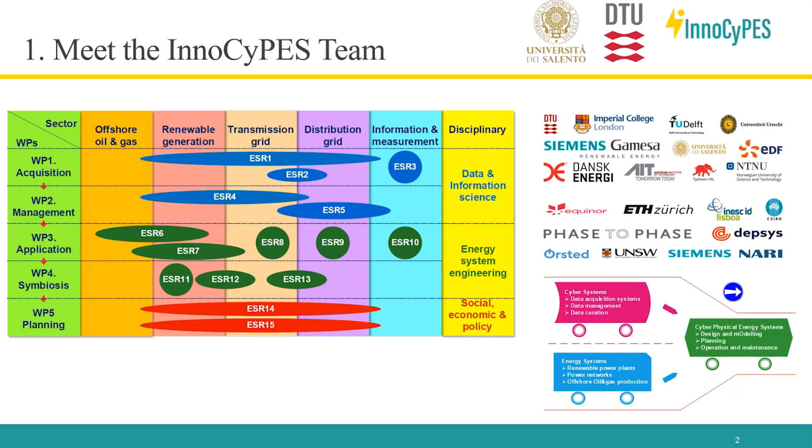But today, after the presentations that our colleagues gave on offshore wind control, robust control, or for instance, communications in offshore wind power plants, we would like to focus on the economics and social part. These were ESR 14 and 15, which in our case is Roberto Monaco and I. We would like to give an overview on what's the value of all these digital technologies, how to assess them, and also how to evaluate the regulatory barriers that are arising across this deployment of digitalization.

So about the presenters, just a little bit. Roberto Monaco and I are enrolled as PhD candidates at DTU, Roberto at the Department of DTU Management and Industrial Economics, and in my case, at the Department of DTU Wind. We both are third-year PhDs. It's been already a long journey with many secondments across Australia, Canada, and different other places where we have shared very good moments and very good learnings as well.

And we have also recently joined the United Nations Economic Commission for Europe, collaborating with the expert group, the Task Force on Digitalization in Energy. And we would be more than glad to give this presentation today, showing more about the topics we are addressing from day to day. This is just an overview of the collaboration network that we have been working on across Australia, Canada, Europe, DTU, also in collaboration with EDF and our colleague ESRs.

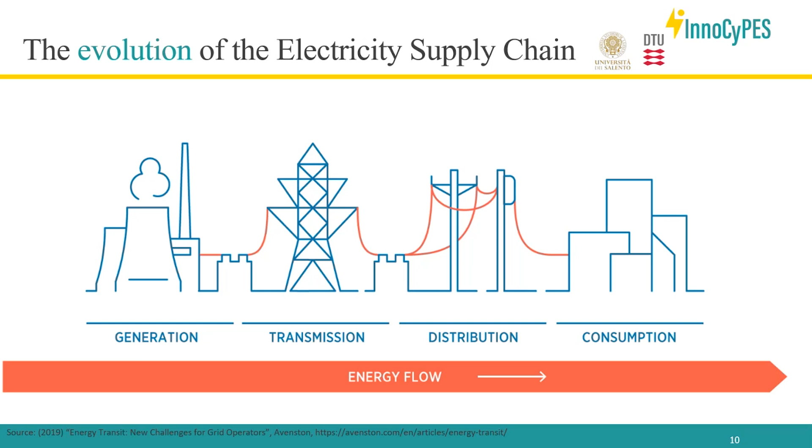And now, this is just to understand why we decided to focus on distribution system operators. So this is the conceptualization of the electricity supply chain as we currently know it. There is a unidirectional energy flow that starts from the generation of big power plants, then is transmitted at high voltage and distributed at low voltage by distribution system operators to the final customers. However, with this energy transformation, this is the new configuration of our electricity supply chain. And as you can see, there are a lot of changes, especially at distribution level.

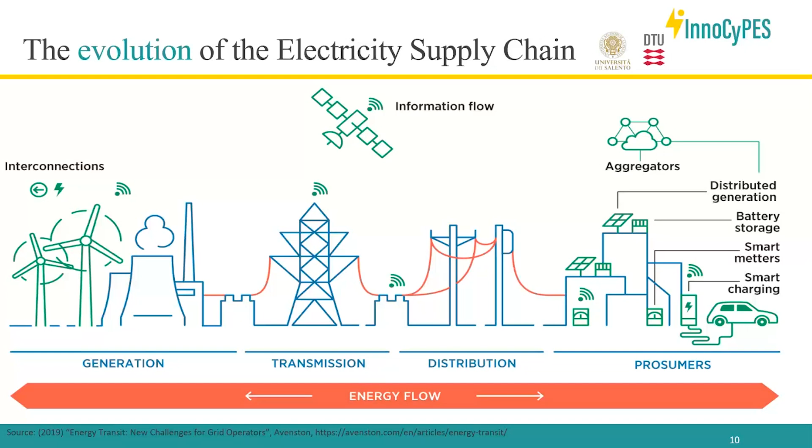You see a lot of new actors that are emerging at the interfaces between the distribution system operators and the final customer. We have emerging actors like aggregators, prosumers, and also an increasing integration of renewable energy sources, smart meters, and smart chargers for EVs. And this was one of the motivations that made us choose distribution system operators as our main target, as they are going to face a lot of challenges. In particular, when we are talking about renewable energy resources, 70% of the capacity of new renewable energy resources in the EU and UK will be connected to the distribution grids.

And the distribution system operators, from one side, are facing a lot of challenges in integrating new renewable energy sources, EV, so they need to increase the capacity of the grid, a grid which is old and where the observability is still lacking. So as I said before, in order to unlock the flexibility and face the challenges of the energy transition, they need to modernize.

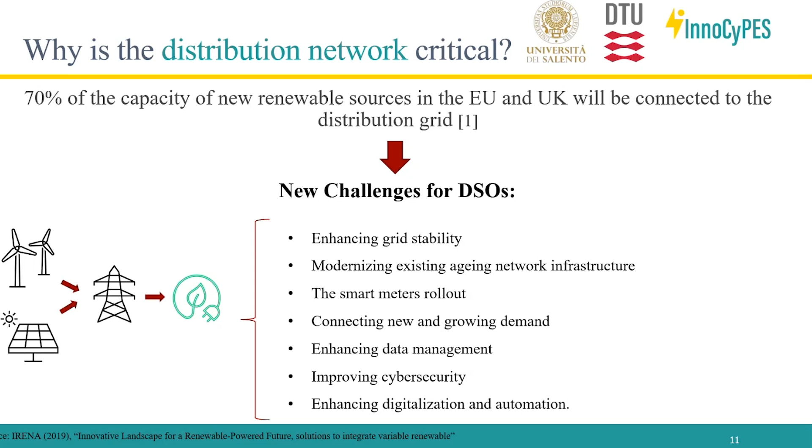From one side, they need to upgrade the grid in terms of capacity, so infrastructure investment, but also digitalization investment in order to unlock real-time operations. And in order to face these challenges, another motivation is that DSOs need to enhance their current role. Because in the traditional system structure, in academic terms, the DSOs used to have a passive role, just regarding the connection and disconnection of distributed energy resources, transforming high voltage to low voltage and then distributing it.

So a more passive role in the grid, while in the future, with this increasing integration of distributed energy resources, they need to take an active role in peak load management, distributed energy resources, network congestion management, procuring voltage support, and better communication with the transmission system operators and so on. So as you can see, DSOs are playing a vital role in the current energy transition. And among all the actors, they are the ones facing lots of changes.

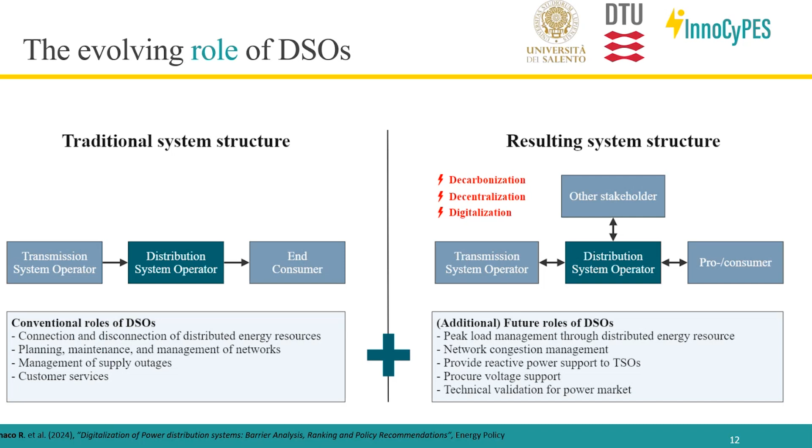And this is just a logical recap that I would like to show you. So as I said so far, DSOs are playing a pivotal role, and they need to empower their current roles through digitalization investment. However, nowadays, digitalization investments are still limited and partial. Let's think, for example, about the case of smart meters, where the penetration rate around Europe is now increasing, but some countries are still under 30% penetration.

And when we talk about visibility at the low voltage level, we can say that we are almost blind. In a use case in France, out of an asset base of 800,000 secondary substations, just 1% is digitalized. So we make the assumption that something is actually hindering digitalization. And this is the scope of our research: understand what is hindering digitalization, how we can face these challenges, and which methodology we can adopt to face them comprehensively.

And before proceeding, since we're talking about digitalization, it's important to make some clarification, especially in academic terms. It's important to distinguish among three different concepts, common terms that we usually find in research articles. When we talk about digitization, we mean a simple conversion from analog to digital data. The simplest example is translating a letter into a PDF file. So this is a process of digitization.

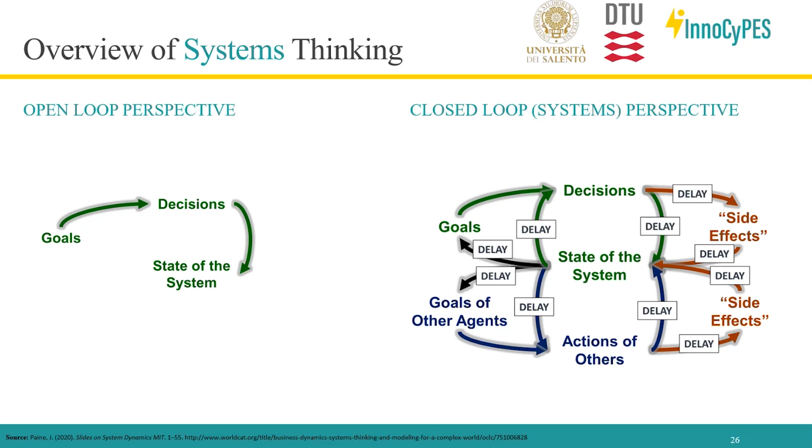They had to evaluate what were the resources on the Earth, the population evolution, and how these resources would evolve over time, to see when, for example, the oil resources would go down, or when would be the peak of the consumption of oil, or when the resources of the Earth would not be enough to supply all of us, right?

And actually, this study was validated in 2020, I would say, and they reached a very good conclusion, which is that they were right. The results match exactly what the estimations were in the 1970s. So look at how important it is to consider in these studies the system perspective and system dynamics.

So we see that these systems exist not only in global dynamics, but also in climate change. We see a very good example of feedback loops and complex systems, but also in the power sector. And this is what we are going to focus on in this presentation, specifically distribution grids. Sorry a bit for the ones present, because there are some bubbles. You can see it online with the colors a bit more clearly.

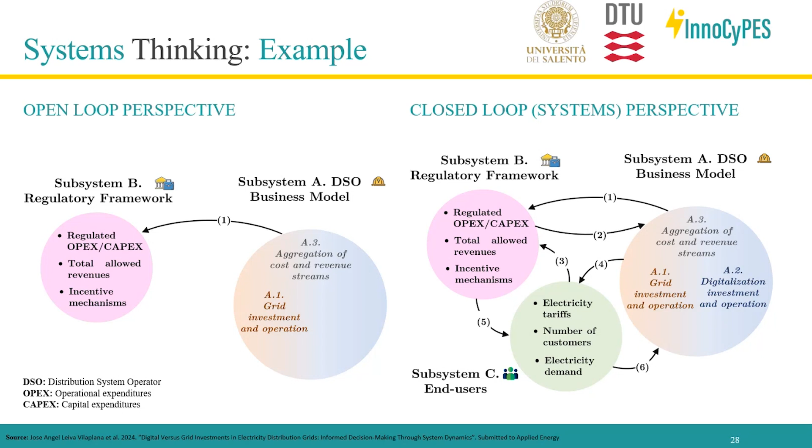So generalizing, what is a system? We all have a very good intuition of what a system is, because our human body is a system. It's a set of interacting elements, in this case parts of the body. But if we think about the distribution system, it's a set of actors, stakeholders that act according to different rules with their different interests and have a different dependency on previous decisions. So that's what we can consider a system. And it changes over time.

It's governed by feedback loops, by feedback structures, and we can observe that it's intrinsically non-linear. All these interactions, delays, and information gaps give us the complexity that we need to assess from a different perspective. So systems thinking can create models and help in describing the feedback loops within systems, and we will see how these models are useful for identifying problems and making more effective policy decisions.

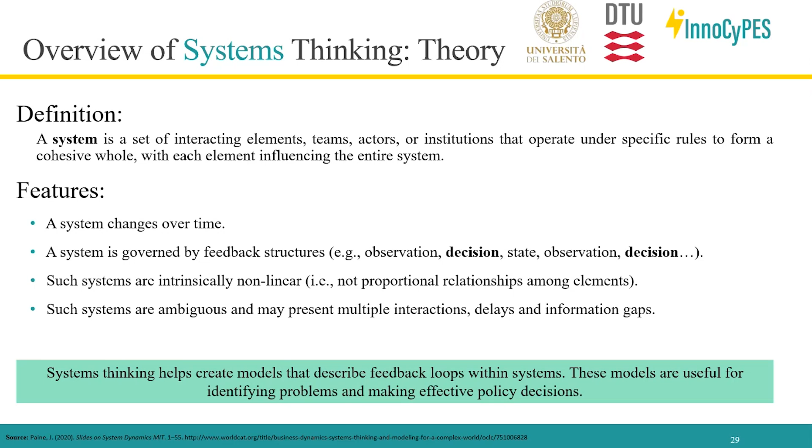So in the distribution grid, very specifically, let me quote the first two. The first two are Eurelectric and EPRI, two very big institutions related to the distribution grid, that mention that distribution grid investment should increase from an average of 33 billion to 66, 67 billion per year from 2025 to 2030. So this is a very significant amount of new investments.

Also, EPRI says that part of this investment would go to digitalization, and EPRI mentioned a long time ago, actually, that the societal benefits of digitalization or smart grid can be indirect and hard to quantify, but cannot be overlooked. So this is what we see from the system, what we can observe. All this news, all these quotes, but can we really see why? We would like to know how this happens, why it happens, and what are the decisions that lead towards these consequences.

And behind these decisions, there are some structures. The structure of a system is what drives the behavior and what drives the consequences. So this is exactly what we want to analyze. We want to see how this complex system that I mentioned before works and what are the specific variables that are hindering

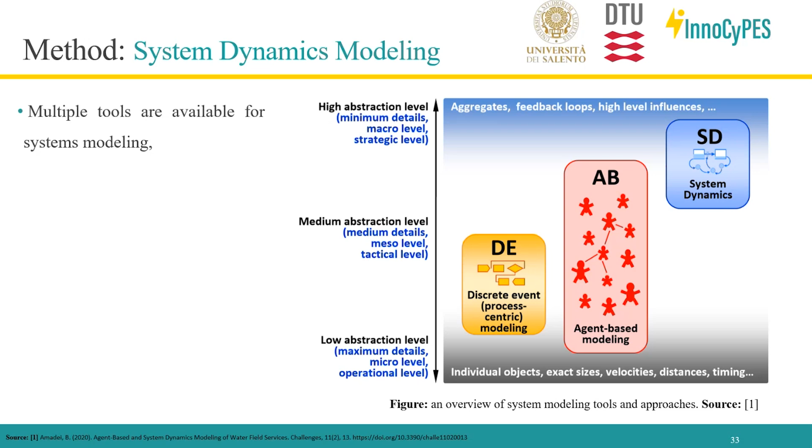We want to go towards system dynamics, which can provide us the abstraction level to match the big goals that we see from the European Commission or from the International Energy Agency with the reality of digitalization and the reality of the new grid investments that are required. And here is where system dynamics is the selected option as a methodology.

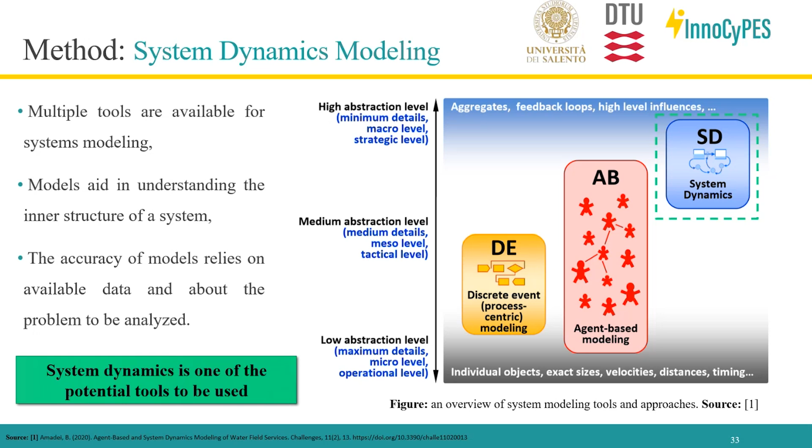What is system dynamics? Now we go into the specific methodology. This is a modeling methodology that arises in the 1950s from MIT, from Professor Jay Forrester. He started this idea coming from control theory, from the idea of feedback loops, applied to systems that are not specifically power systems or other systems related to power electronics, but in this case to social systems, population systems, urban dynamics, or the evolution of climate change, for instance.

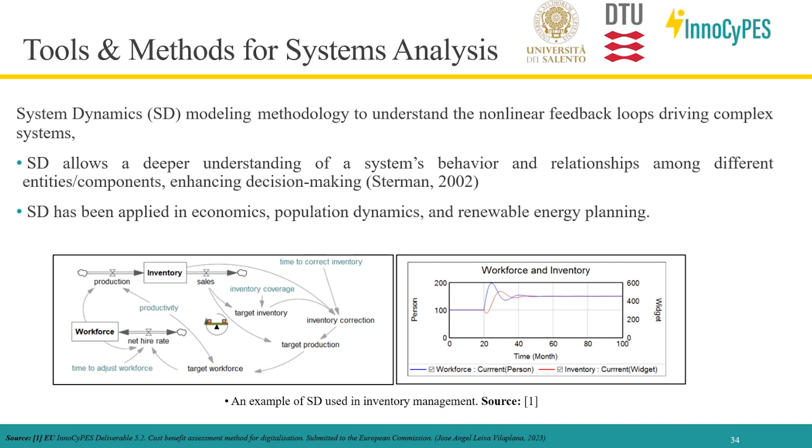So other types of variables that are also driven by differential equations. Each of these blocks actually represents a differential equation, and we see how this differential equation leads to changes in the behavior when we make a step response, as we see in the right-hand side of the slide. So system dynamics has this potential of assessing the high-level and highly complex problem.

And I wanted just to give you an overview of the main concepts of system dynamics very quickly. So we have all these keywords: reference models, causal links, causal loop diagrams, feedback loops, model validation, simulation.

Some of you already know from your studies, but I want to say that system dynamics has a very standardized process in the literature that has been carried out for different years. However, I just wanted to clarify that the definition of the system comes with a process of qualitative definition.

So we need to know and define the process, define the problem that we are modeling, and then start gathering data and, of course, executing and defining the different equations, validating these equations, and then simulating how the system evolves towards different scenarios, different policy decisions, or changes in parameters. And for that, I'm going to explain what these main concepts are.

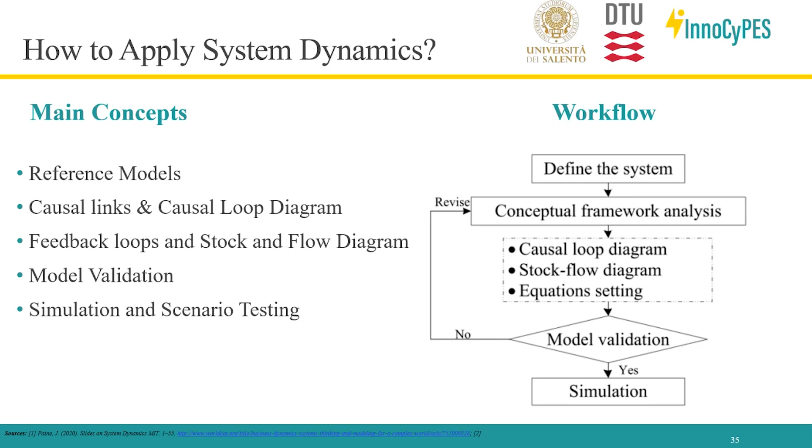So what are reference models? First, when we define system dynamics, we need to know what variables we are modeling. We need to know, for example, what is the evolution of electricity. In this case, what is the evolution of renewable integration?

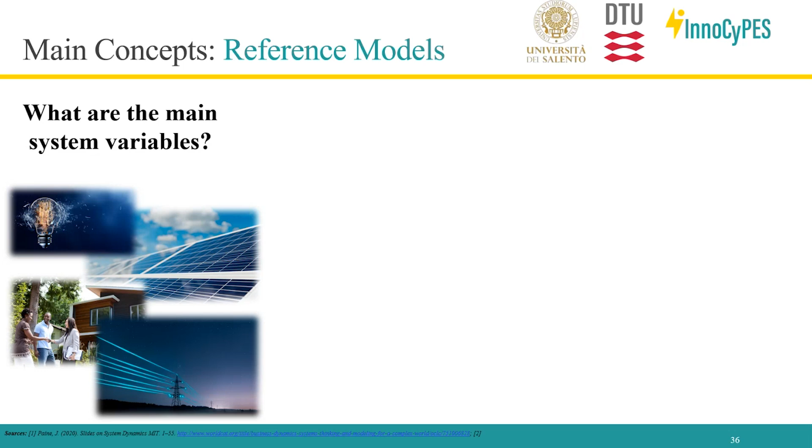What are the consumption patterns as we see in the electricity consumers, the final consumers, or what is the peak evolution of the consumers, or what is the population growth in the different areas, or what is the state of the grid that we have right now. So these are the variables that we need to know, and we mentally have to envision the different trend that we are going to see in these variables.

Humans, we are very good at thinking about linear models, at forecasting linear models, but we struggle when we have to address non-linear systems. And that's a reality, right? So that's why we have so many good tools from control theory, from other theories to address these issues. So I mentioned that we have to go through qualitative, quantitative, validation, and simulation.

So once we have identified what the reference models are, then we need to know, okay, what is going to cause this reference model to happen? What are the variables that are affecting this behavior? So we need to make a causal chain. We need to think about cause and effect. That's one of the most natural reasoning processes that we have as humans, cause and effect.

So let me say that in the legend, the plus means a directly proportional relationship. So if variable A grows, variable B will grow, and otherwise. And inversely proportional means if variable A grows, variable B goes down. Okay. So think about grid loading rates. How is our cable loaded? 20%, 30%. So it depends on the consumption and depends on the power capacity, right?

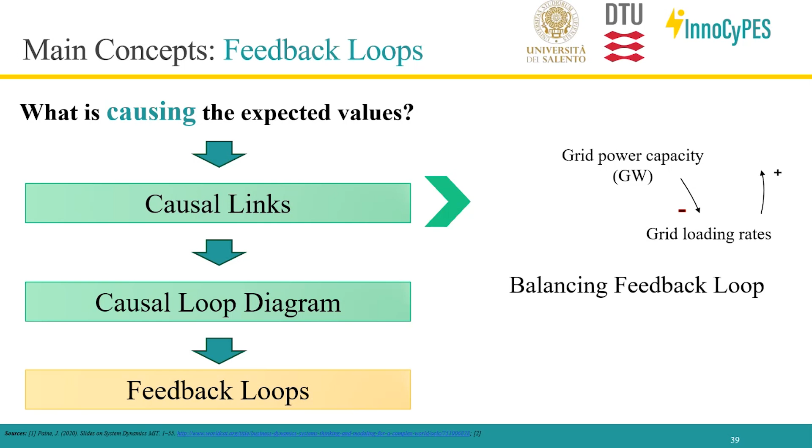This balancing feedback loop that we see on the right-hand side tends to goal seeking, or tends to slow down different processes in the system. So this is the principle. This analysis of feedback loops is the principle to perform a qualitative analysis of the system. And this enables us to know what are the variables that are affecting one specific behavior.

For example, imagine, let me ask: if in terms of investment we have multiple reinforcing feedback loops affecting the new investments in digitalization, would you think that the system would incentivize this investment behavior, right? And if we have more balancing feedback loops, we would think that the system is reluctant or tries to slow down this new trend. So it counteracts new trends, right?

So we have this intuition, this nonlinear behavior. It's a bit difficult because we are more comfortable with linear assumptions, but in this case, that's the reality. Roberto will explain this qualitative feedback loop analysis in detail later on, but this is the principle to carry out this type of analysis of a complex system.

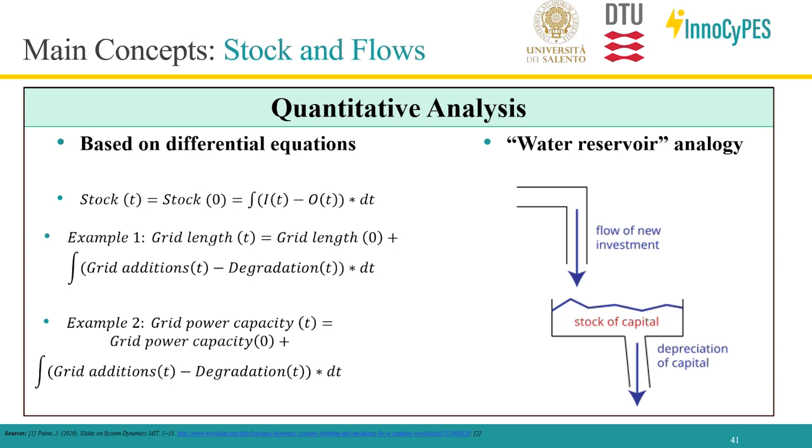So we make many reservoirs to model how the system will evolve as a whole, and then connect all these reservoirs to model the feedback loops within the system. And this is the principle of quantitative system dynamics. We are also talking with our colleagues on data analytics and smart meters, and they know this validation process very well. You need to validate, train your model, execute, and test, of course.

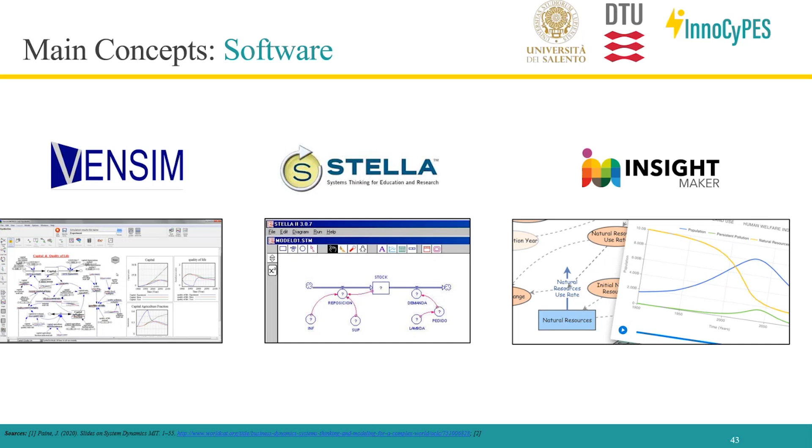The idea is that our model represents the real behavior that we see in the real world. In the training part, we need to represent historical values. So we validate the model: our model represents the real world. This we can do with different software. These are some commercial software that I'm not going to mention. And this is the one we are focusing on here because it's open source, and we want to make everything open source in this project, right?

This is a very fast overview. I know it's a lot of information, but I just wanted to give you a glance of system dynamics. You can read more. You can take a look at Forrester. It's a very nice piece of work, the handbook of system dynamics, more theory, more introduction to system dynamics. But I think this gives you a little bit of speed in the process of understanding the qualitative and the quantitative modeling. So thank you.

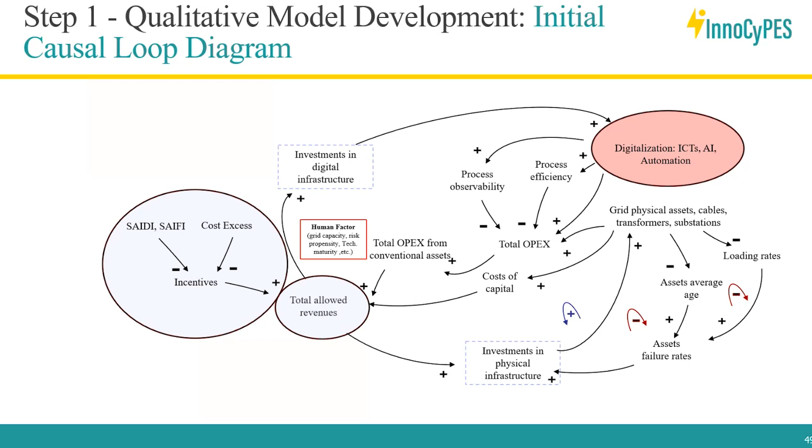So what we are going to show now is the application of this conceptualization to the Australian use case, and show you how we exploded the total allowed revenue, the incentive mechanism schemes, and also how we exploded these 2 main voices of digital infrastructure and physical infrastructure. And this is the final version of our regulatory subsystem. We'll use the pointer.

So as you can see, the allowed revenue is influenced, in particular in the case of Australia, by the building block approach mechanisms, which consist of the operational expenditure, the taxation, the return on capital, which is defined by the regulatory asset base, and the depreciation. So these are the four main terms, plus this revenue adjustment from incentive schemes.

And in our study, actually, we are focusing on this contribution to the allowed revenue in particular. So understanding how we can change our incentive mechanisms in order to have a huge impact on allowed revenue, and so provide more investment capacity for DSOs. And the strength also of this visualization is that we can see also the interaction with other subsystems.

So, for example, if DSOs decide to make an investment strategy, this investment strategy has an impact on the grid, and this is somehow interacting. For example, an investment strategy can cause fewer failures, and this allows the DSOs to access a certain incentive mechanism, both for a reward or for a penalty. But both can then have an impact on the allowed revenue.

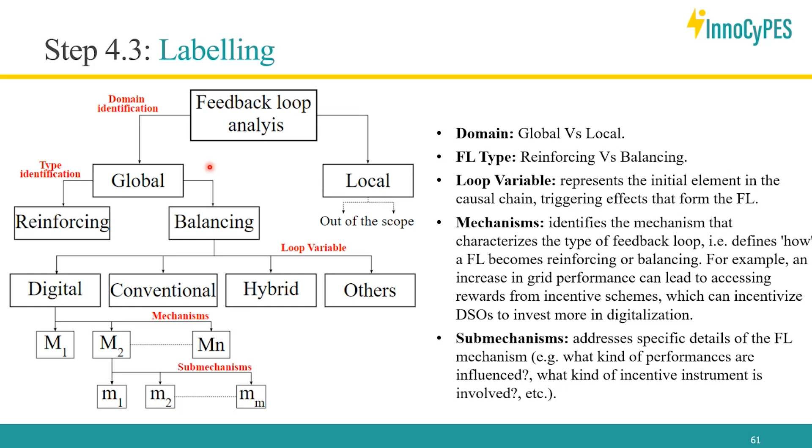And then we have the sub-mechanisms, which actually specify in detail, as I said before, what kind of performance we're talking about and what kind of incentive scheme is involved in the feedback loop. This is actually complicated to hear, but I will show you an example of how we apply this label. So this is a case where we have a single feedback loop, a feedback loop that is not hybrid, that does not contain both digital and conventional investment.

So as you can see, the information that we can retrieve from this label is that we are dealing with a feedback loop which is global, so it's interacting with multiple subsystems, and which is reinforcing. And in this case, the variable is digital investment. So we have a feedback loop that is actually beneficial for digitalization investment. And we wanted to add also another piece of information. So this I for us is digital increase.

Yes. And then we have to understand why this is a reinforcing feedback loop. So what is driving this? This reinforcement is driven by an improvement in performances, which allows access to certain rewards from this capital expenditure sharing scheme in Australia, so a CapEx remuneration scheme. So you can understand that in a single line, we have a lot of information regarding a certain feedback loop.

And this was actually fundamental to speed up our analysis, make order, and provide a framework to categorize feedback loops that was still not in place in the literature, because we were not able to find that. And it was also fundamental for the selection process of feedback loops. And then here is another example of a hybrid label that we applied to a feedback loop. In this case, we have both conventional and digital investment involved in this feedback loop.

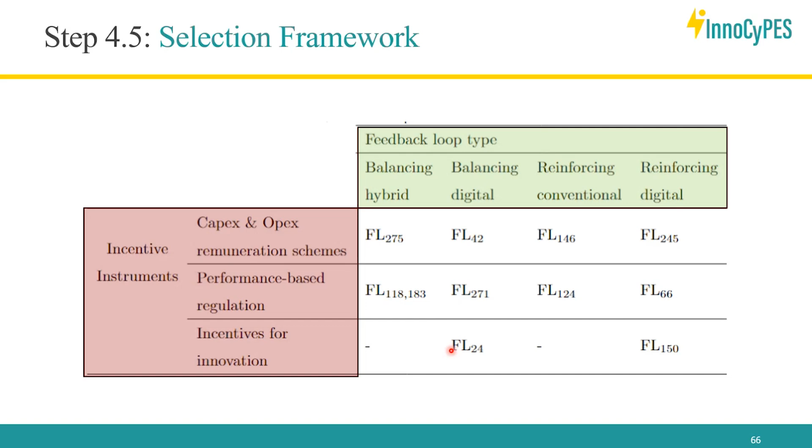And now we move towards the most interesting part, actually, because once we selected these feedback loops, we started our discussion with experts in the workshop. It was an online workshop that we conducted from Canada when we were conducting our research stay at the University of British Columbia, and the stakeholders were in Australia. So it was actually not easy, but we tried to make it as interactive as possible, and actually it was a success because we were able to retrieve a very informative discussion and a lot of usable policy recommendations that will help us understand how to face these obstructive dynamics that we developed.

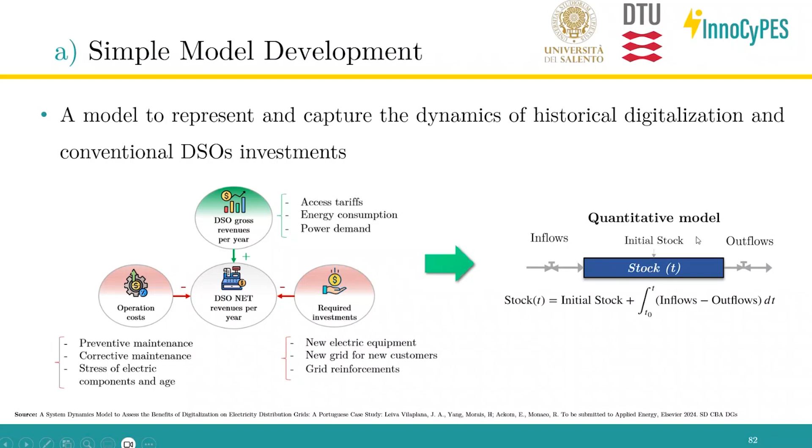That's very necessary. So here we were focusing on the areas of the DSO, the subsystems that we described before within the DSO part, seeing how the operation costs evolve, the required investments or the revenues, and tracking and finding what are the causal chains from them to make these stock quantitative models, if we recall the first part of the presentation.

So how to generalize a system dynamic model for any generic company, so we could model the dynamics of every company. So first, I would like to come to the field of business dynamics and the departments of business, where they study or identify a company in generic as the combination of different dimensions.

The value creation dimension, which means the infrastructure of a company. What are our resources? What is our set of, for example, in the distribution grids? What are our cables? What is the status of our grids? What are the operational maintenance elements? What are the numbers of stations, the length of the cable? So all this is what creates our resource, our infrastructure.

The value proposition is what we know as the customer side. So how the customer side is handled in terms of what products do we sell, in this case electricity. But it's not sold, it's a service that we need to provide as a regulated utility. Yeah? So what are the tariffs at which the electricity demand is charged, and how this brings the revenue? So this is a very generic structure.

And then how aggregating all the costs and all the benefits brings us to the cash flow. Let's say what is our bag as a company in terms of benefits and costs, and how this bag is emptied when we invest or filled in when we receive the benefits.

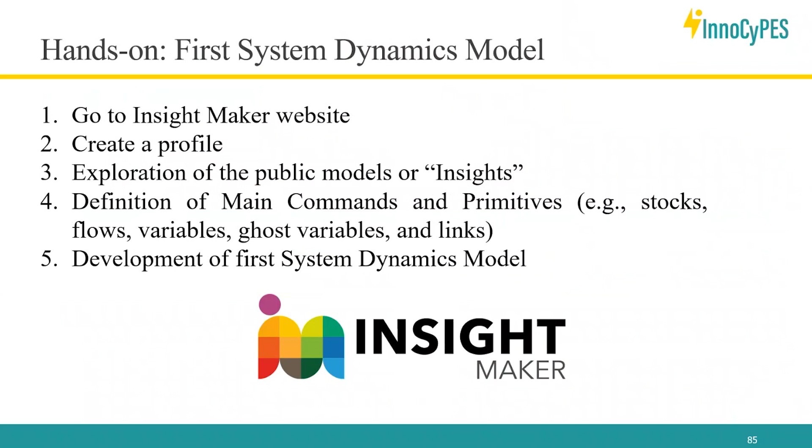So hands-on. Let's open, please, Insight Maker. Go to the Google page, Insight Maker. If you have not registered, please register if possible. I will also guide you through, and we can do this together. But it's better if we can have it open. So we will go to the Insight Maker website. We'll create a profile, and then I will do as I'm saying.

And first, I want to show you that this tool is an open source platform that is not only for system dynamics, but, as I mentioned before, agent-based modeling. And it's just a visual representation of differential equations, and you can include other types of equations. So you can explore insights. There are public insights that experts and academia share in the Insight Maker platform. In Explore Insights, we can see different types of models, from population growth, environment.

In this case, if we focus on energy, we can see some of the models that different people are working on, like vehicle to grid. This is one very nice example from the literature, and we can see how the different variables connect to each other, how this part that represents a state of the differential equation is affected by inflows and outflows, and how in settings we could set simulation start and simulation length.

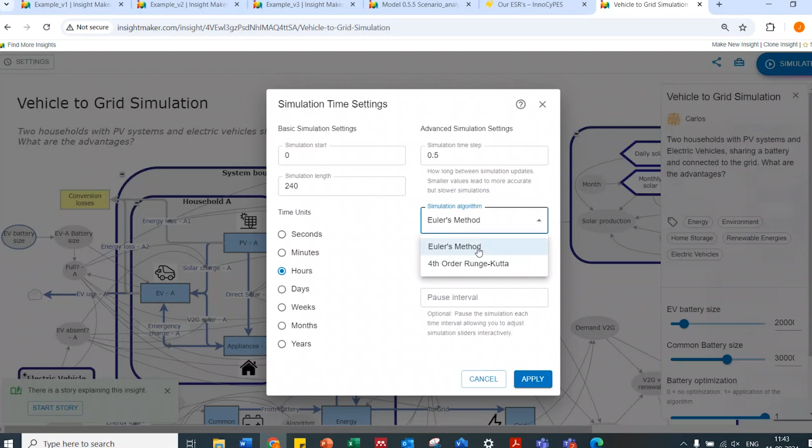If we want to simulate per seconds, minutes, hours, what is the time step, and what is the simulation algorithm. And here, if we take a look at the manual, they recommend Euler's method for agent-based modeling and fourth order Runge-Kutta for system dynamics. So this is the recommendation from the Insight Maker tool.

These tools provide here a set of sliders. Do you see the sliders here? Yeah. So here is where we could change and define our scenarios. This is a scenario that was predefined by this author, but basically here we can simulate our model. In this case it is vehicle to grid simulation, but we could also simulate it by changing different parameters. It's very nice. We can see in real time how changing this battery size, months, the results change. But this is just to give an example.

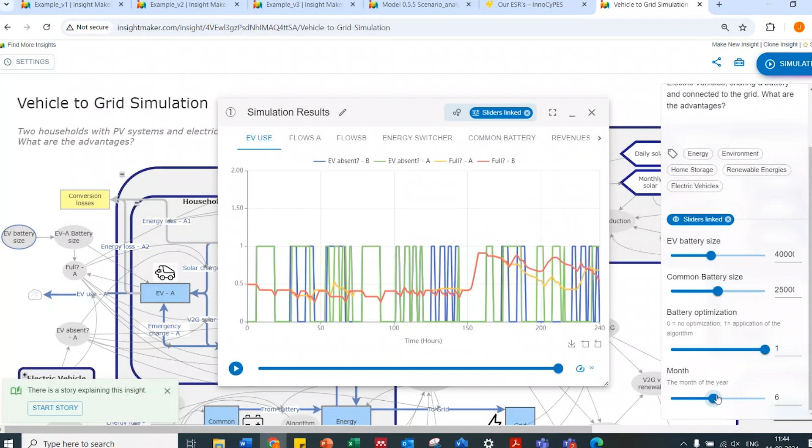Let's jump into our model. Yeah. Okay.

So when we are here in home and we click create a new insight, you will see this. In getting started, you have a clear overview on how to make a new model. Here I call it example version one. Important to say is that you can save it as public or private. Private, you will have it in your own private repository, and public, it will be shown in Explore Insights, what we showed, with a specific tag that we include, okay? So let's define it public for now.

And here, all this information I will try to summarize very fast. So let's clear this canvas. And what they call primitives here in system dynamics are different elements that we can add to the model. It's like our toolbox. We have elements for agent-based modeling: agent, state, actions. We can add pictures, design, text. But let's focus on these three: stocks, variables, and converters. So what is a stock?

So here, this stock, we could define it and change the name. For example, we can say the grid length of the assets, because it's a state, we take a picture of this variable. So we need to see what is the level of it during time and how this is affected by the flows. This is what we were including before. This flow would represent additional increase of length per unit of time.

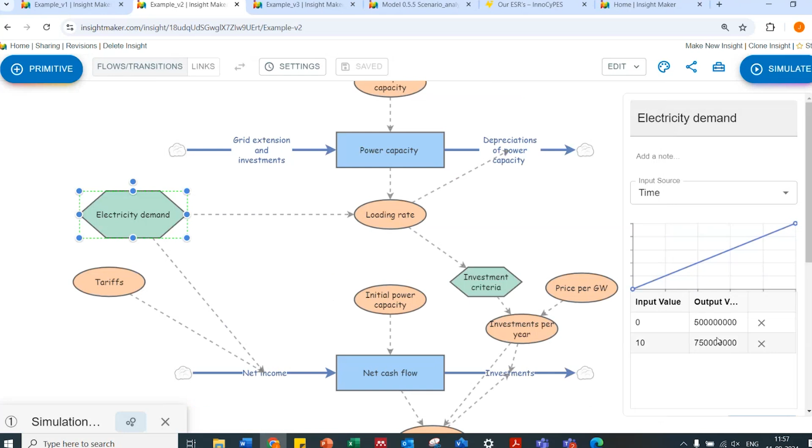Okay, so this is already a model that has the two stocks, and we don't have a significant amount of loops. So we don't have loops that are connecting the two parts. But if we go to a bit more sophisticated model, where the investments are changing the grid extension and the capacity, we could see a different element in this loops analysis. This is what Roberto also mentioned before.

So we could see this grid extension and investment affecting the power capacity, the loading rate, investment criteria, investment per year, investment and grid extension. So these three examples show how to make specific blocks within the model. We need to play with the data we have, and also with the amount of assumptions that we make.

Net cash flow, we could obtain data. Power capacity, we could obtain historical data. And this is what we need to match with the evolution of our model, knowing initial power capacity, knowing initial, in this case, cash flow, and also knowing price per gigawatt, investment per year, and the investment criteria that could be affected by different conditions. As I mentioned before, we could also include here different conditions.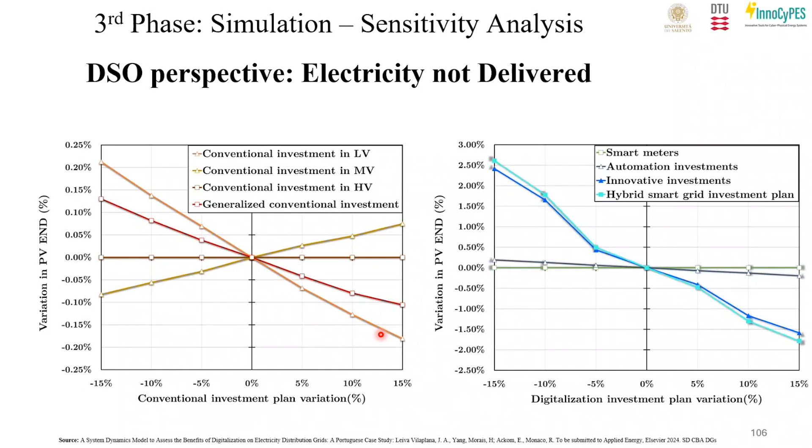Okay, but if we take a look at the digital part, the reduction percentage in the electricity not delivered has an order of magnitude of difference. So we see also a big impact in the electricity not delivered when investing a percentage more in digitalization or in conventional investment. So these are the big results that we found for the sensitivity analysis.

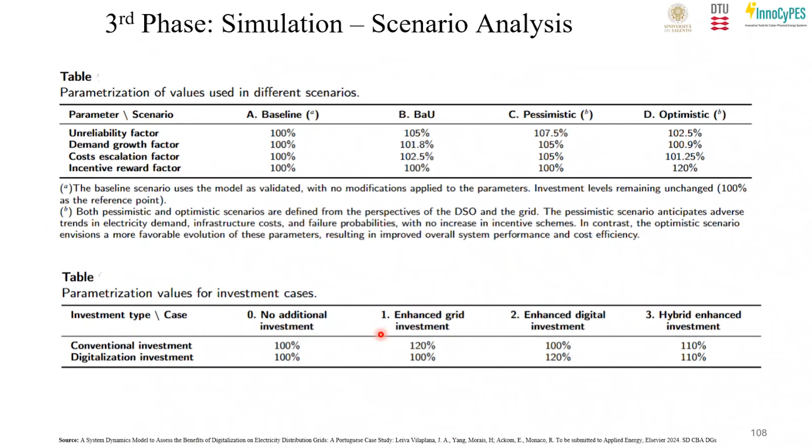And what can we say for the scenario analysis? What happens when we change the reliability, the electricity not delivered, the external conditions of our model? Well, we see that the baseline case, no more investment, is the Portuguese model validated.

It's having a specific net present value, but when we invest 20% more in the grid, in different scenarios, let's say baseline, more pessimistic in terms of reliability, or more optimistic in terms of more reliability and also lower customer demand, we see that the net present values overall in this more grid investment could go down, grid investments go up, but as I said, we cannot invest only in digital.

We need to invest also with a compromise in the grid, specifically in the extension investments and renovation. So this hybrid investment is showing that a hybrid combination of these two technologies could be optimal, not only investing in conventional, but we need to consider the digital area in the equation. So that's the main idea.

So, okay, we are good in time. Yeah, perfect. So I would like to give a summary. Thank you very much for following with a lot of attention, because I threw a lot of information at you, a lot of complexity. Let me summarize.